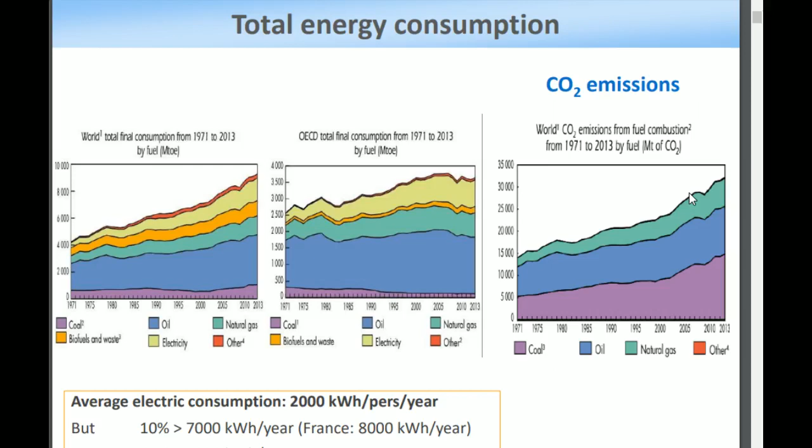very important because they release a lot of CO2. Obviously, solar technology does not emit CO2 -- well, this is false, because a bit later we will see the mechanisms to synthesize silicon, well, a variety of silicon, and it releases a tiny bit of CO2. You also have to consider the transport, but we'll see that later.

So at first, the solar resource: the sun lights the globe at a certain level. We can see that at the poles the illumination is very limited. In France we usually say it's 1000 watts per square meter, and you can see that near the equator it's maximized, due to the fact that even though the Earth is tilted, on average the part that is most lit by the sun is around here.

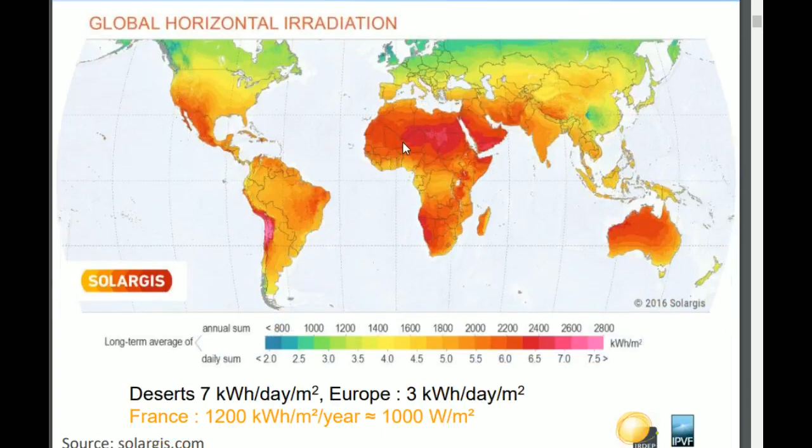Well, I think it's around here, but there are also deserts. So okay, there are deserts. We can think that maybe it will be good to place solar panels in the desert, but it's actually a bad idea because the panels need to be at low temperature, and that's not the case in the desert.

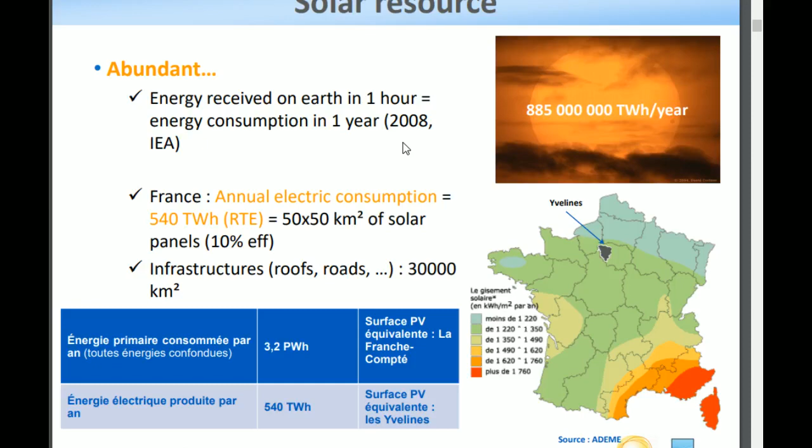So at first, it is a very abundant resource. You could technically power a lot of human technology with it. You can use it on roofs and roads, and in France it could be a very good opportunity because we can install it very quickly.

One of the problems is that in terms of time it's non-constant. During the day there are clouds, and the intensity of the illumination is not the same. Monthly you will have a peak in summer, but not really in winter, and even through years you can have a fluctuating intensity of illumination.

So the solar spectrum: the sun emits something that is really close to what's the name, Boltzmann's law, one of the Boltzmann laws. It's some kind of curve that peaks at a low wavelength and then diminishes slightly. You can calculate it. Yeah, it's Boltzmann's law -- something like the wavelength in micrometers is equal to 2898 divided by the temperature in Kelvin.

Then you can see that there are little weird things: the absorption by some elements, dioxygen, water, and there are also a lot of other elements. So as you can see, the spectrum is a bit weird with this chainsaw-like shape, and the visible wavelength is around here. We can think that at first the first solar panels were gathering the energy around here, and now with research we are capturing the whole spectrum with the panels.

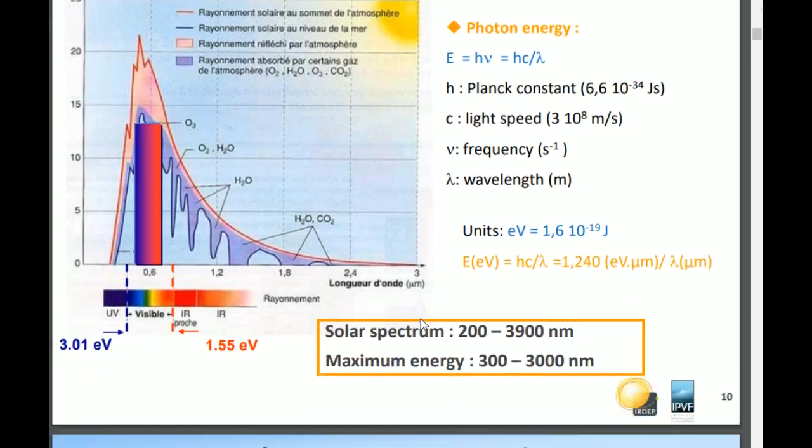Okay, so there are a few technologies of solar conversion. The biofuel, so everything with photosynthesis. The thermal and heat production, which can involve a panel that uses water as a flow, and the sun radiates on it and it goes back to the home.

And there is also another kind of thermal heat production called thermodynamical plants. It looks like this: you have lots of mirrors that are concentrated on a single spot, and it can reach really high temperatures, with a special fluid used to gather energy. And finally, the topic of this presentation is the photovoltaic.

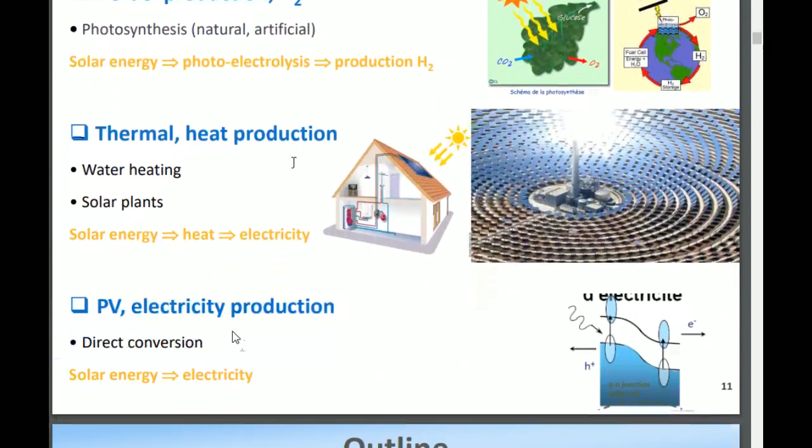Okay, so that's pretty much it. So the history: at first we had an electrochemical cell by Becquerel. However, it was not really about the light. It was just a notice in a paper where he remarked that when the cell was under the light, it could generate more energy.

The real solar cell is the one by Adams and Day, which was specifically designed to be under the light. Then we have the first cell using silicon. So silicon is one of the most frequent materials that you can find in the ground, alongside dioxygen in the deep layers of the ground. So we might not run out of it, and basically it's sand. So with sand you can build the panel.

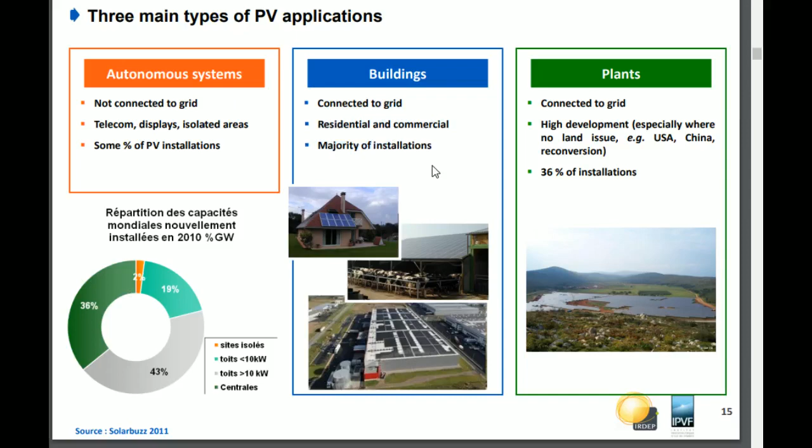Yeah, there is also this one that is used sometimes in the industry, but I'm not going to talk about it yet. So there are three types of PV applications: the autonomous systems that work on themselves, buildings, so residential or commercial, or plants that are connected to the grid. So the autonomous systems can work on themselves. It used to work on small calculators. It can work on very isolated sites.

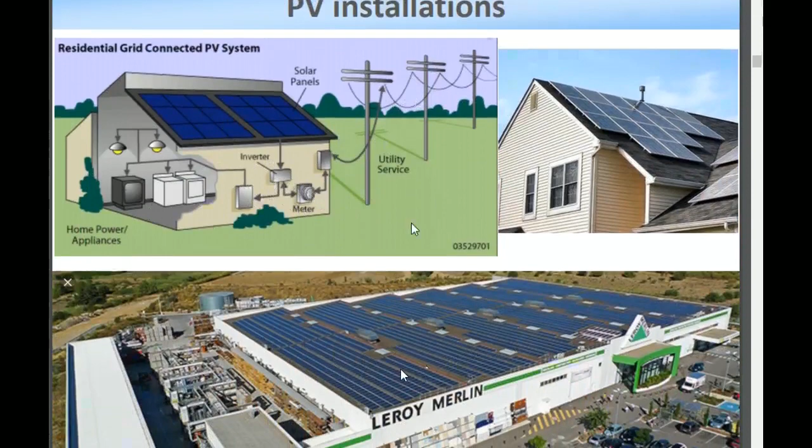I'm not going to go too much into detail, but what you have in a residential grid is usually a panel, an inverter, so in French an onduleur, a device that regulates the charge, called a régulateur de charge, and the battery. And you can also supply it to the grid or use it for home power. It's sometimes convenient to put it on commercial parts because you can't see them, and it produces a lot of electricity. You can also build them directly on the surfaces.

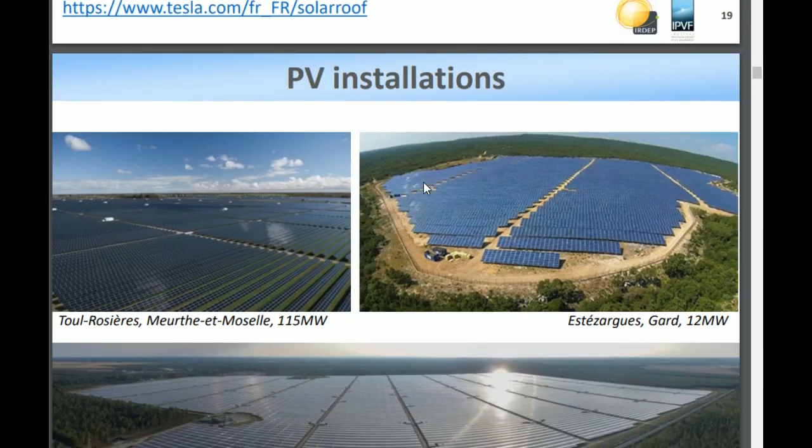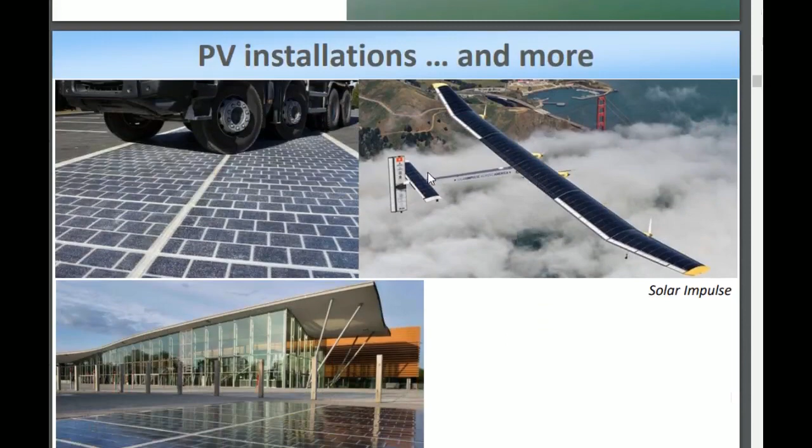So there are also great plants that produce a lot of electricity in the desert, like in Chile, or in Korea. As I said earlier, the efficiency increases when you are at lower temperature. So building it on the river is very good because the water cools down the panel, so it's great. And you can also have the panels directly on a plane or in the street.

So for the grid, you can have a sum of this. The PV panel will have modules and bypass diodes. Bypass diodes matter when one of the modules is shadowed: the current might go reverse, meaning that the other modules that are lit will use the shadowed panel as a charge, and the bypass diodes will prevent it, since otherwise the energy produced goes directly into heat, and this means that the energy would be lost.

There are systems of balance: charge controller, storage, cables, converter, so DC to DC to adapt the voltage, the inverter, so onduleur, and mounting frames. And finally, you can output either to your AC loads, like the usual stuff, DC loads, which is a bit rarer because usually you don't use DC outputs, or directly to the grid.

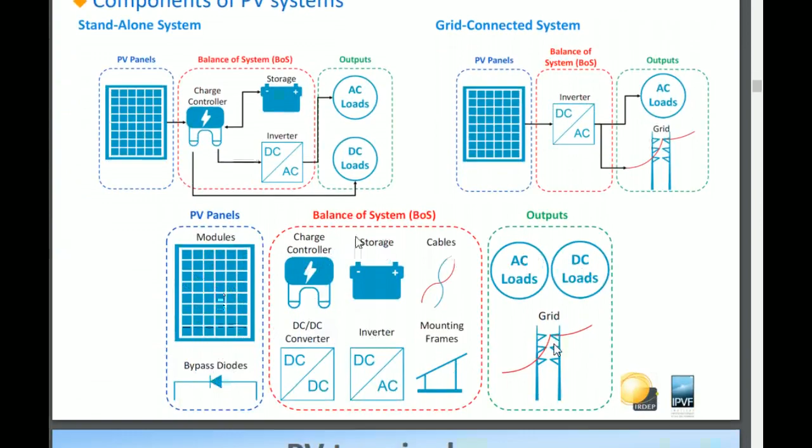So the solar cell is a single cell. It's very small. A module is an assembly of solar cells, so it usually has a lot in it. And when you have lots of modules, you make panels. And when you have the panels, you have a solar plant.

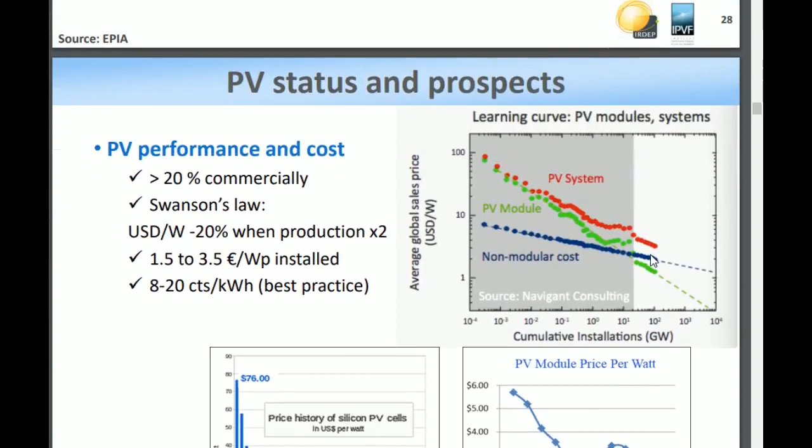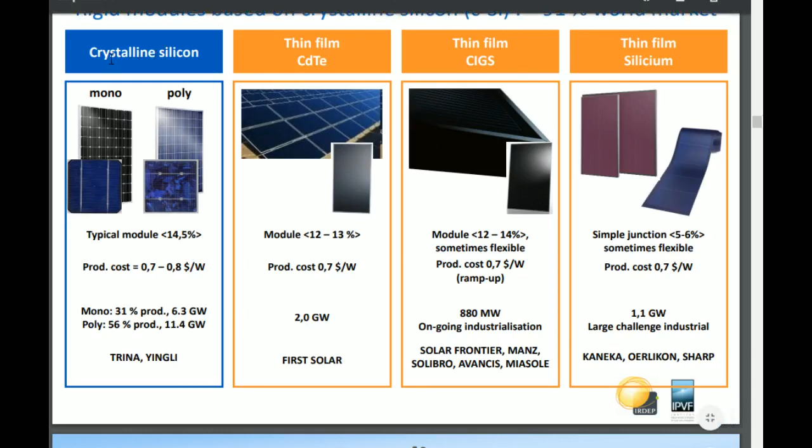Okay. So now let's talk about technologies. So crystalline silicon is the one that is the most used. It represents 91% of the world market. The thin film, usually cadmium telluride, CdTe, or CIGS. So the thin film technologies are the ones made by deposition, and the crystalline ones are made by crystallizing the cell. You can notice that these companies here are made in China, so that explains a bit why they are top of the market.

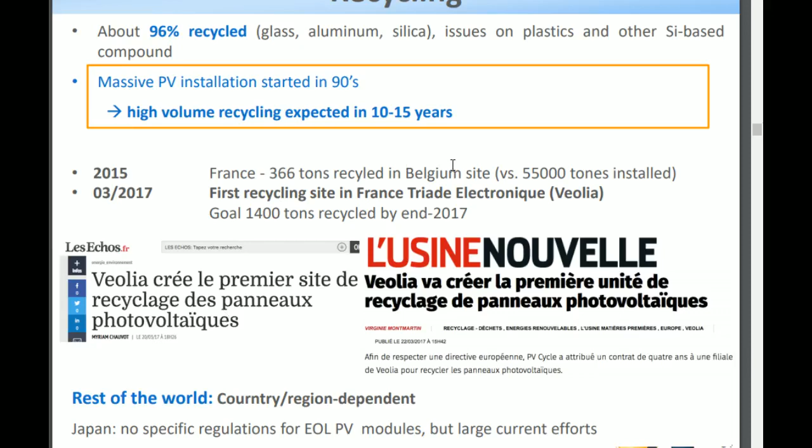Recycling. So in Europe, there are regulations about recycling PV modules. We will talk about it later in the analysis of the life cycle. Okay. So recycling is very important. 96% of the panel is recycled. Recently, a new site has been constructed by Veolia, but before we used to recycle in Belgium. For example, in Japan, there is no specific regulation for PV modules.

So the challenges are to get cheaper panels, to have better ones, to have ones that better fit consumer needs, and stable ones.

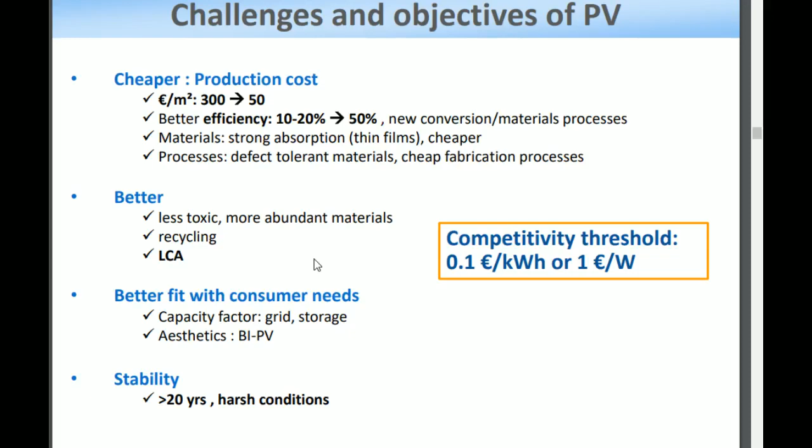Okay, now let's do a bit of physics. So when a photon enters the material, it has energy that is quantified, so it's quantum physics. It goes from an occupied level to a non-occupied level, and there is an energy called the gap energy. And there are three main things to consider in solar cell operation: the generation of carriers due to light absorption, the separation of carriers, and the collection of carriers at terminals.

Okay, so at first, a metal does not have a distinct conduction band and valence band. They are both in the same part, so electrons are free to go from this part to this part, and the electrons can move freely in the metal. When you have an insulator, the band gap is really important, and the electrons are usually stuck with their atoms.

A semiconductor has a small band gap, and you can see that there are electrons that are in the conduction band, and you have electrons that are not here in the valence band. So you have rare presence of electrons in the conduction band and high presence in the valence band.

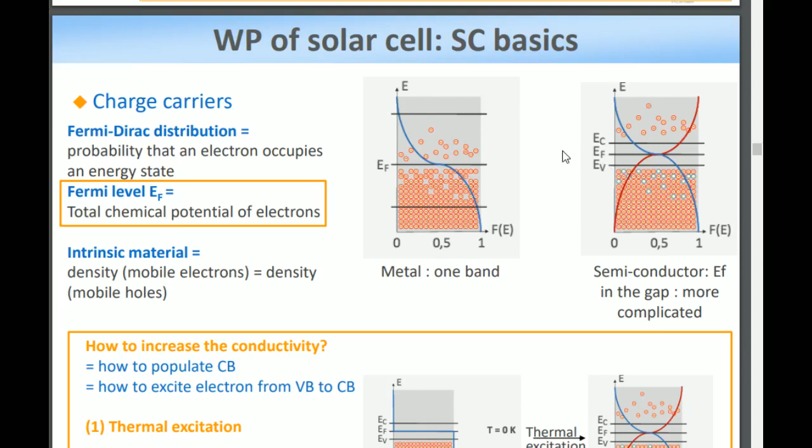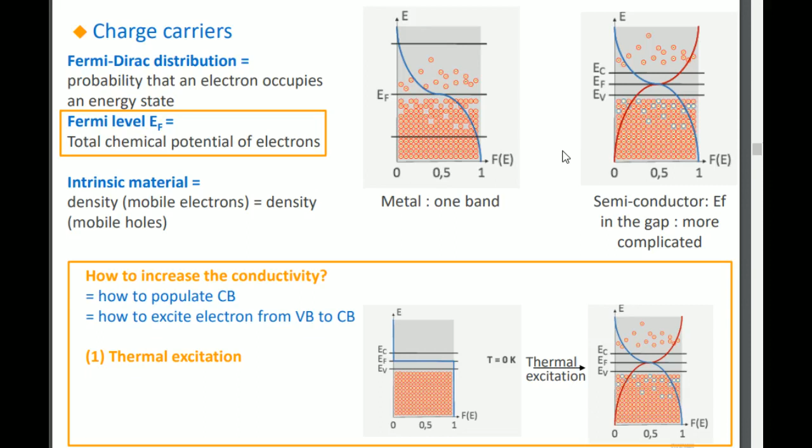While for a semiconductor, the gap is really small, but the electron can go on the two sides. So when it's here, the Fermi-Dirac is very close to the lower layers. So for an intrinsic material, the density of mobile electrons is the density of mobile holes, because it means the material already has holes in it, in opposition to extrinsic materials that have carriers that are added by the human. So you can, for example, increase the conductivity.

So the charge carriers, when you have doping: you can either add the impurity or it is already in it. So when you dope, you are in an extrinsic material, and otherwise you are in an intrinsic material. So for example, here we have a matrix of silicon, and we replaced one of the silicon atoms by phosphorus, and it means that there will be a negative carrier that is added to the matrix, and you will get N doping, so a donor.

And if you replace the Si by boron, you will have a negative charge and a plus, and this plus is called a hole, a mobile hole. It does not really represent something in reality. However, you can view it as an anti-electron. Why? Because in material engineering, even though you can't see it, it represents a charge locally that is higher. So like some kind of antiparticle of the electron, but it's not a positron. You should not say that it's a positron, because it's not. It represents that on average there is something that exists, so we consider that it exists. Okay.

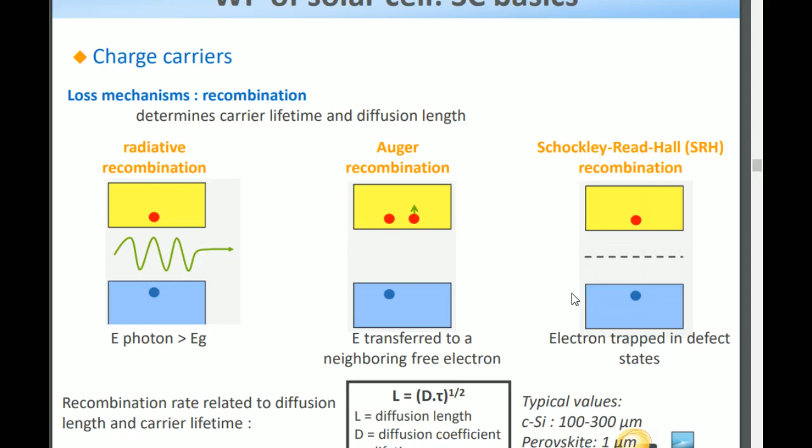There is the Auger recombination. When you have an electron down and one up, the up will give its energy to another up. The up will go higher, and the down will go down. And finally, the Shockley-Read-Hall, so SRH recombination, occurs when you have an electron trapped in defect states. It's a bit more advanced, so I'm not going to talk much about this one. But there are a lot of mechanisms involved.

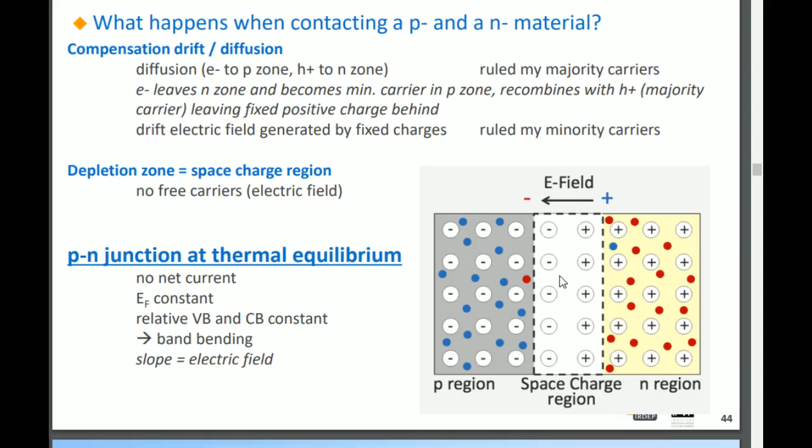So to evaluate the performance, we build the curve I in function of V. So you can recognize that in the dark you have the characteristic curve of a diode, so LED, DEL, I don't know the acronym, something like that goes like this. And when it's lit, you have this kind of curve that looks like this expression from the material engineering, and it will be very helpful to have this curve later.

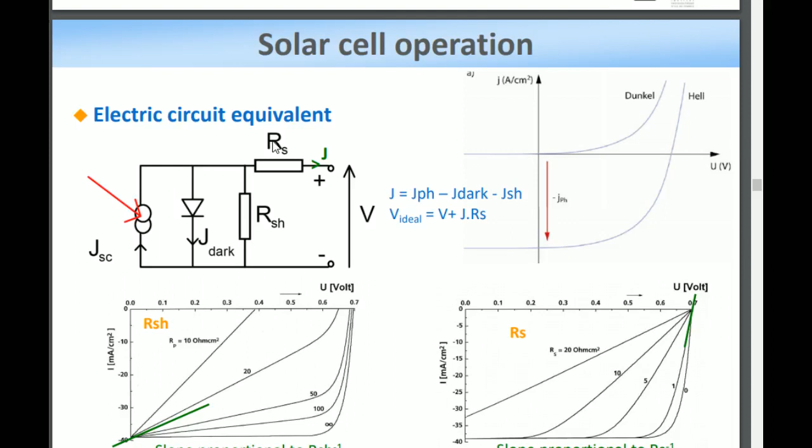So you can do a modelization of the cell. So the cell on itself will be all of these things. So at first a generator of current, a diode that will limit the sense of flow of the electrons, a resistance that is called the shunt resistance, SHUNT, and the series resistance. And you can see that we used to build the different characteristic curves.

So at first we can notice that the derivative where U is equal to 0 is equal to the inverse of the shunt resistor, so the slope here. And otherwise we can see that the derivative when I is equal to 0 is equal to the inverse of the series resistance. What else? So usually like in every field of engineering we have some conversion efficiency.

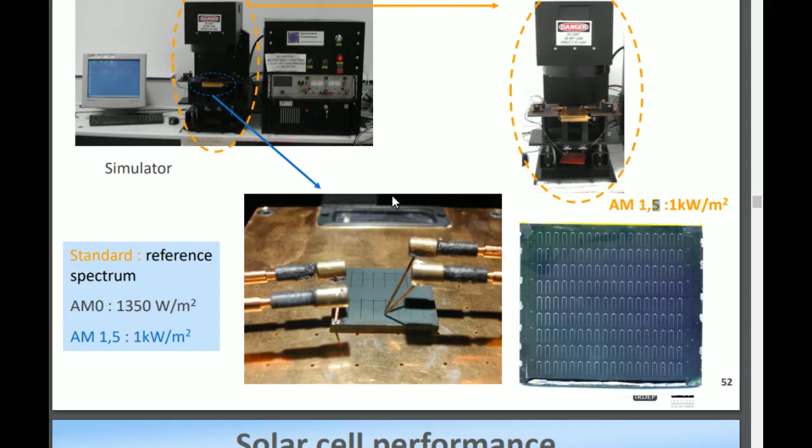So usually you can do simulation. So there are standard criteria for evaluating solar panels. For example, AM1.5 is a reference for the inclination, the tilt of the panel, and a certain enlightenment.

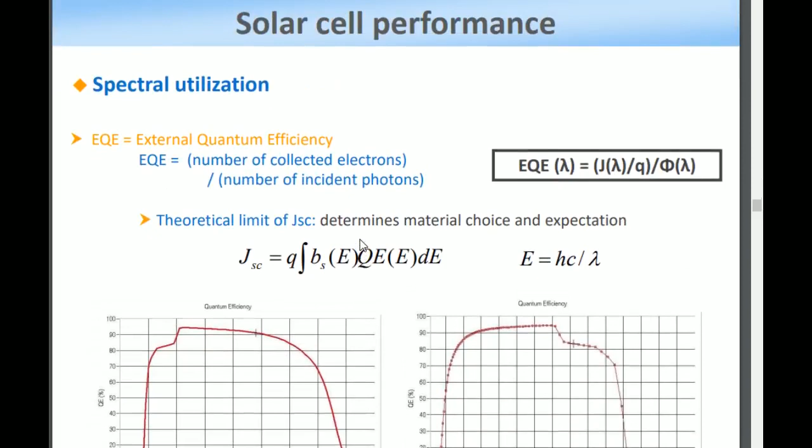Then, okay, so now we will talk about external quantum efficiency. So it's the thing that is on this axis, and here on this axis you have the wavelength, and here the photon energy. So it represents the energy that is gathered depending on the wavelength by the panel, and obviously you will have a theoretical limit depending on the material choice.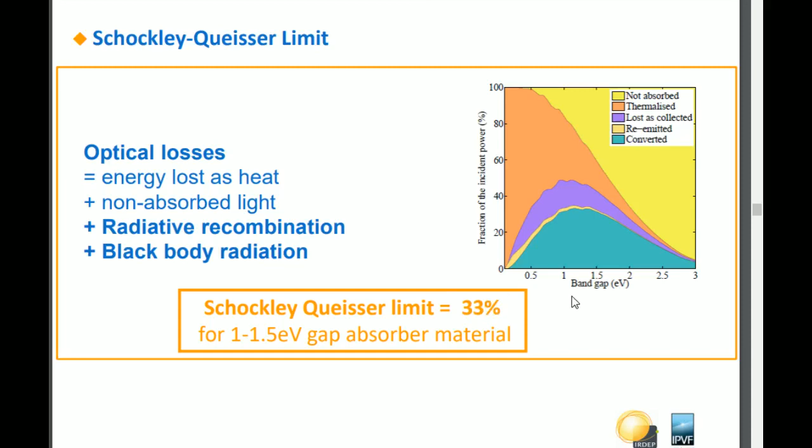However, we've seen earlier that the efficiency could reach values that are higher than 33%, and we might see it later. I will explain why we can overcome this limit and how we did it. So you can see that depending on the choice of material you take as a semiconductor, you can have a various range of spectral responses. Usually we take the gap value of 1 or 1.5 electron volt. It can also happen that there are parasitic optical losses. Yeah.

So the production in terms of the market, it's mainly polycrystalline silicium, monocrystalline silicium, and thin films. Okay, so now let's talk about the silicium. So the silicium has a structure that is very like the one of the diamond. So usually we call it a cubic diamond structure.

Okay, now how does it work to synthesize the silicon? So at first you have something called silicium quartzite, in French silice. So it's a rock that is taken from the ground. Then you have a furnace that is pretty much the equivalent of the ones you can find in metallurgy. So basically you heat really high. So the temperature of fusion of the silicium is 1500 degrees Celsius. So you put it in the furnace and you can extract metallurgical Si. So once you have this, you can split it. For example, this will also be used for electronics to build a semiconductor for the CMOS people.

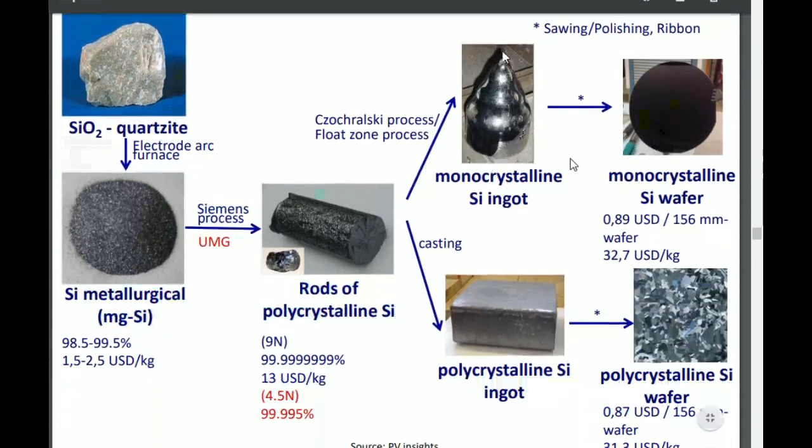So the electrode arc furnace is the one that you can typically find everywhere in metallurgy. So you have carbon, you have silica, so it's oxide of silicium. You make it heat with a temperature that is higher than the temperature of fusion of the silicium. So a lot of things happen. You recover the energy, and you have your silicon.

Okay. Now, the manufacturing of the silicons, we have a Siemens reactor. So we have a quartz frame, silicon rods, and the graphite electrodes. So it's kind of complicated, but basically what you do is you put the silicium, and you will have some kind of purification called the Siemens process, using hydrogen chloride, and it will purify of all the things.

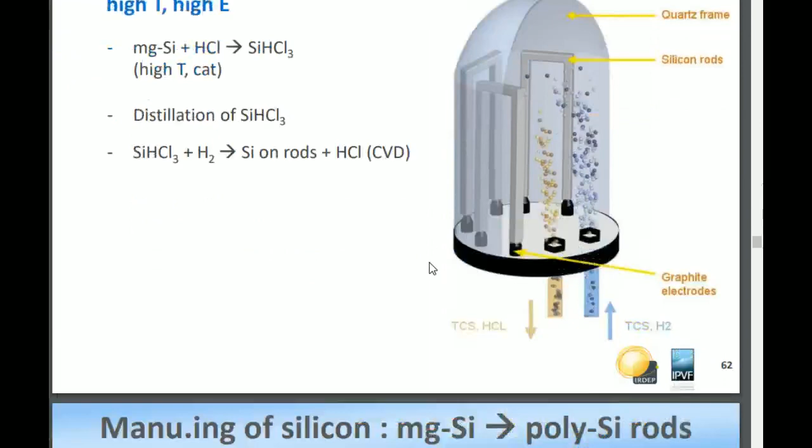So you will have mg-Si plus HCl that will get this. So this is a gas, and then you do a step of distillation, and with dihydrogen you will grow silicium on rods, and you will have HCl that is useful for CVD. So this is what a big tower of Siemens process looks like.

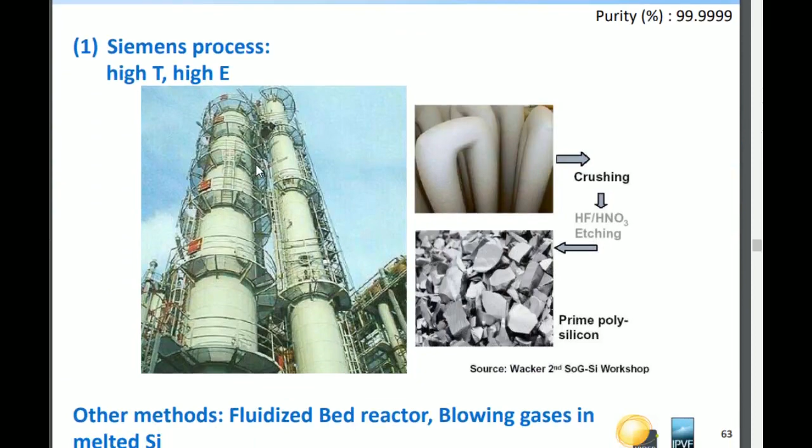Okay, there are other methods. Oh, okay, so this is the Czochralski that I was talking about. I forgot that there was a slide about it. So here you have a seed of the crystal. As you cool down, the crystal will take the structure of the seed that is higher. So by implementing this seed, that is something that you add by yourself to the silicium, when you cool down, it will take the same structure as the top one.

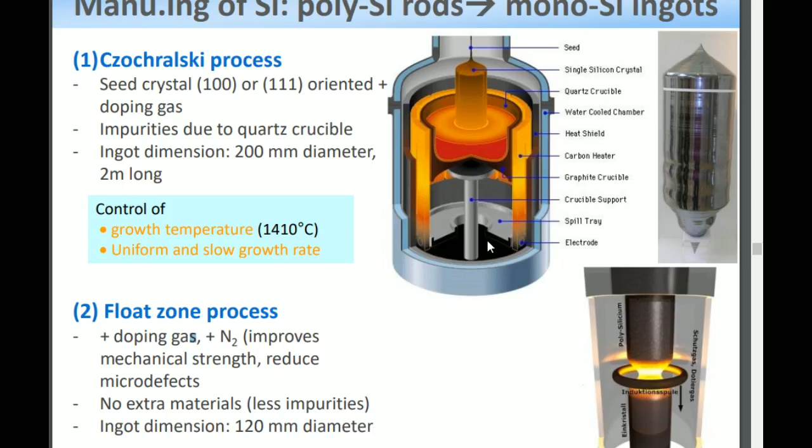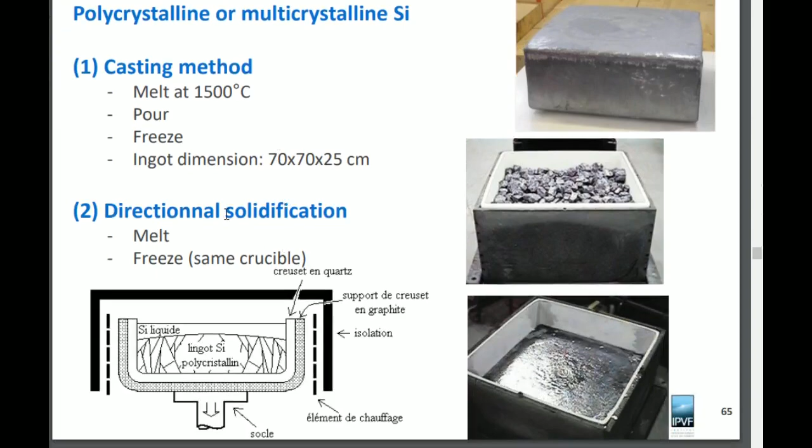There is also this process, but I don't know exactly how it works. It's some kind of doping gas. Oh yeah, I forgot to say, in this Czochralski, you can add doping gas in your semiconductor. So depending on what you want, you can add it directly, and it will directly go inside the matrix of the material. So to go from polyrod to polyingot, you just melt it, and you can have also directional solidification.

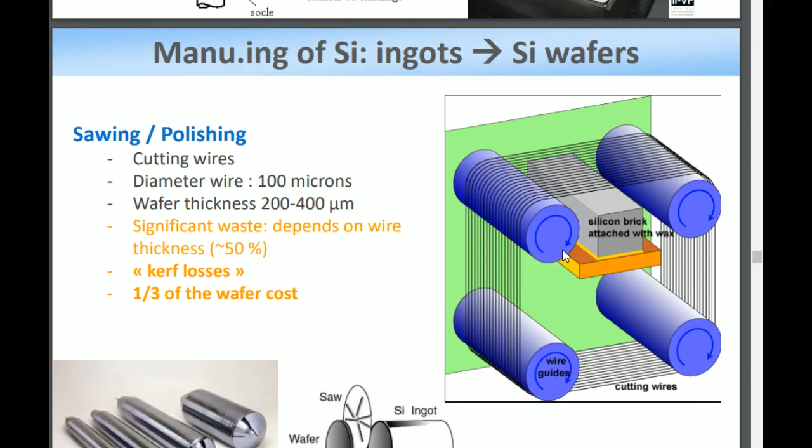Now you must turn the ingots into wafers, so you cut it, and there are also lots of losses due to the fact that you cut. And in recent years, the kerf was not recycled, and now we use it. We recycle the kerf because it's a lot of the cost. It's 1/3 of the wafer cost. Oh no, the sawing and polishing is 1/3 of the wafer cost, but the kerf can be really significant. So around 50%.

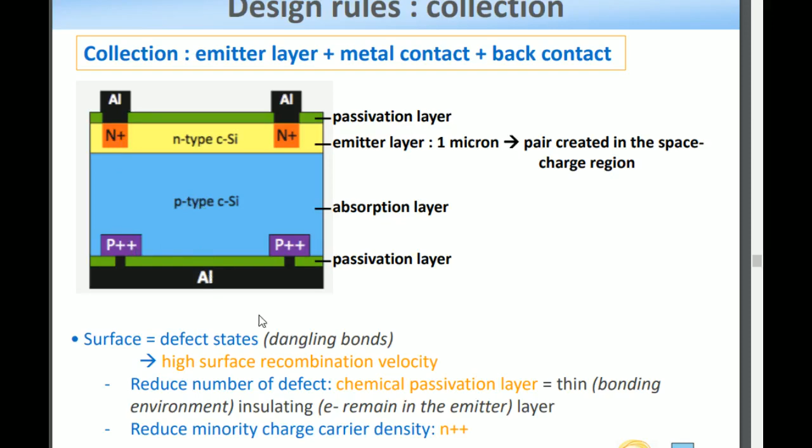Now, the collection. Once you have your pair of charge carriers, you must collect them. So this is what it looks like. Okay, you can have a certain amount of plus, N plus, P plus, P plus plus. So I'm not going to go back into that. But you have your NP layer, your N plus, P plus, and also the aluminium in order to get the current, so the conductor.

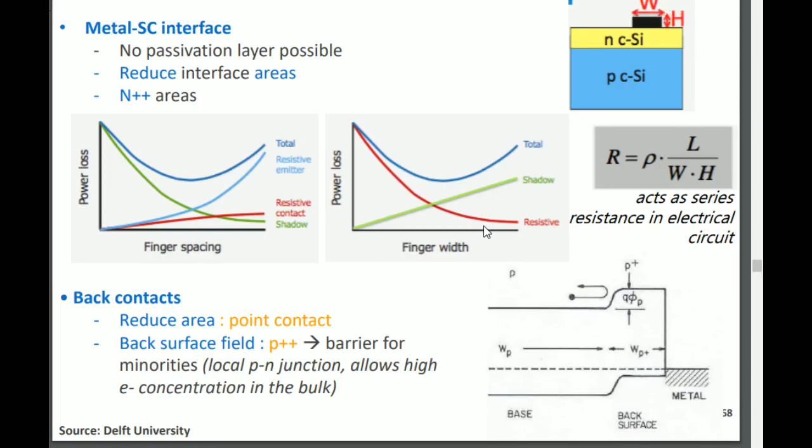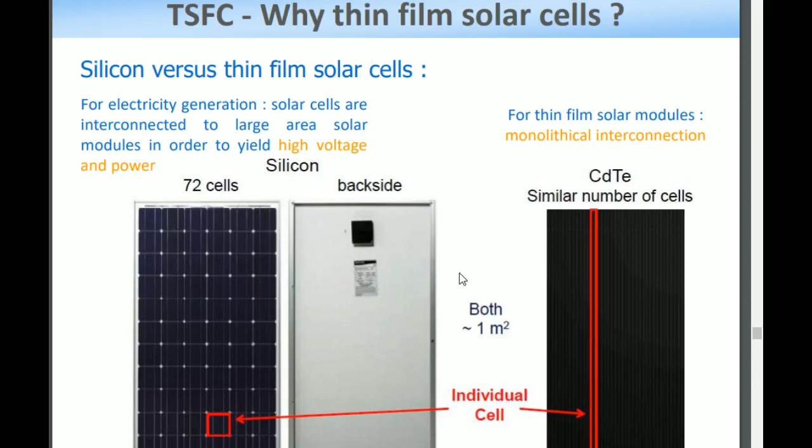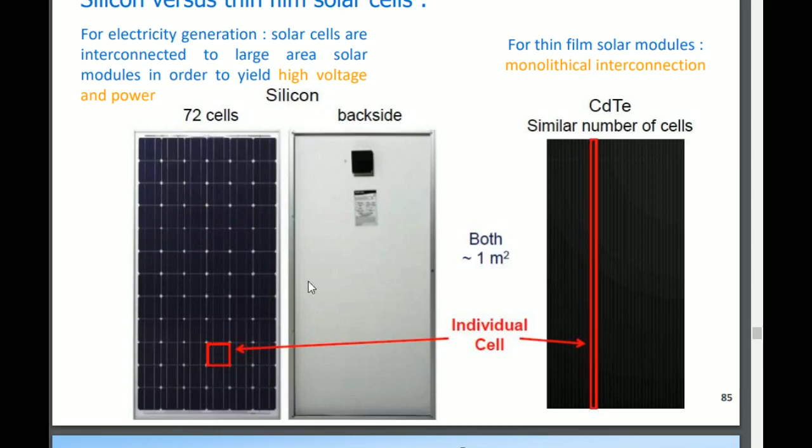Now you can see that the different cells can have different forms. For example, here you have a square cell, and here you have a long rectangular cell, with some kind of monolithic interconnection, so everything is linked between them instead of having small squares. This is what it looks like on the interior.

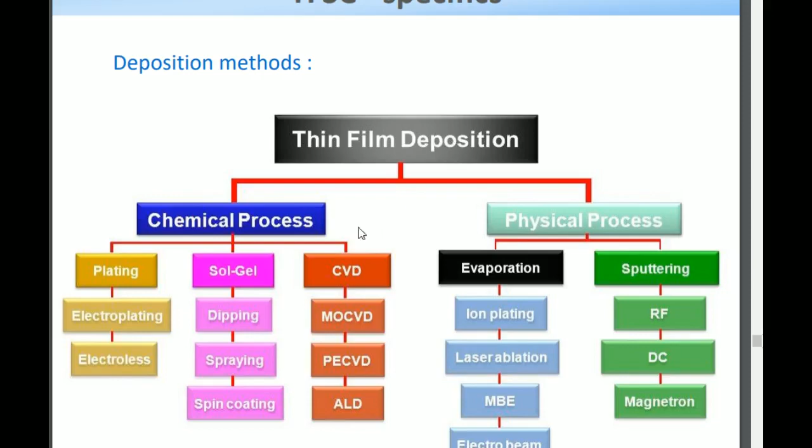Now let's talk about the deposition methods. This is really interesting for the new technologies. You have two big families: the chemical process and the physical process. The most common is CVD, chemical vapor deposition, and mostly plasma enhanced chemical vapor deposition. There are also lots of techniques that are more on the research side.

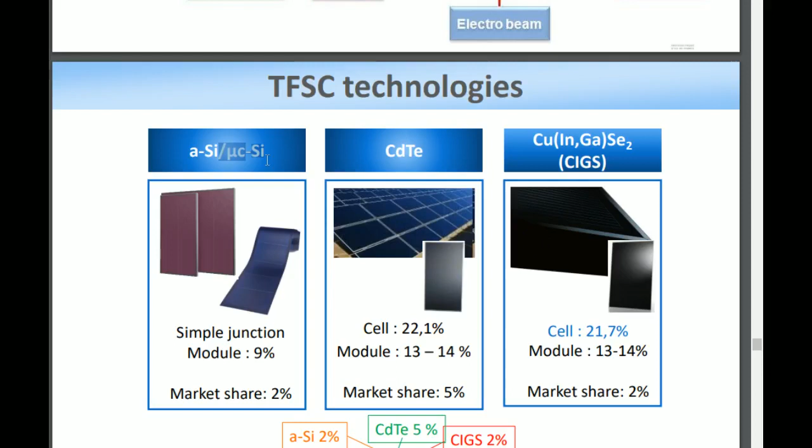Now about the new technologies: here you have amorphous silicon, a new kind used in simple junction modules, or microcrystalline Si, which are new technologies. There's also CdTe, cadmium telluride, and CIGS - copper, indium, gallium, selenium. You can see that these have a really small share of importance in the PV market.

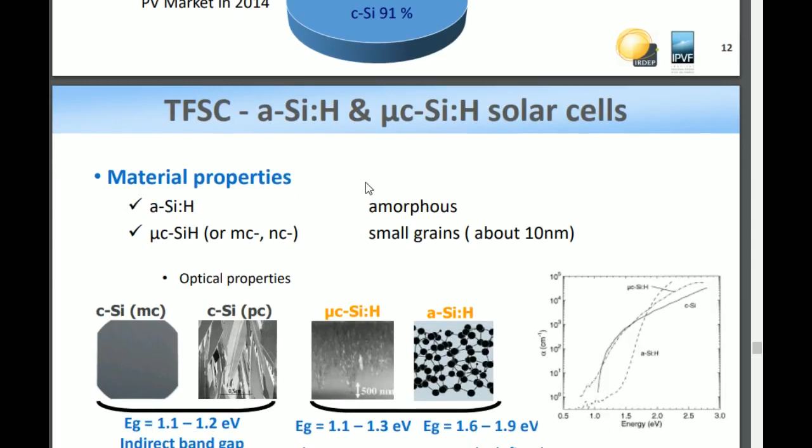They have a gap that is near an electron volt, and they're really close. So what does this notation mean? This means microcrystalline silicon with addition of hydrogen.

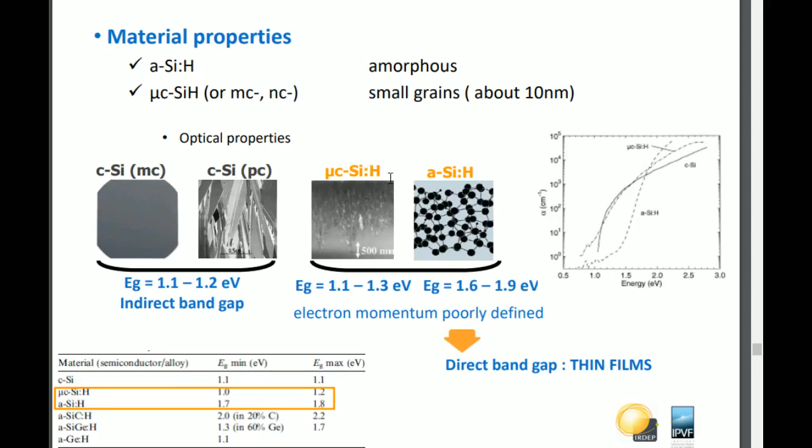What that means is inside the structure you will add hydrogen, and the fact that you add hydrogen is not something you actually want. It's usually the result of bad synthesis, or just the natural process - well, not really natural, but when you synthesize it, you get hydrogen that appears due to the imperfect parts of the synthesis.

So this is what it looks like, the H. Basically your ideal structure will be like this, but sometimes a dangling bond will pop up. You can see here it's 5 to 10% of atomic hydrogen, and the dangling bonds involve high SRH recombination, which is bad.

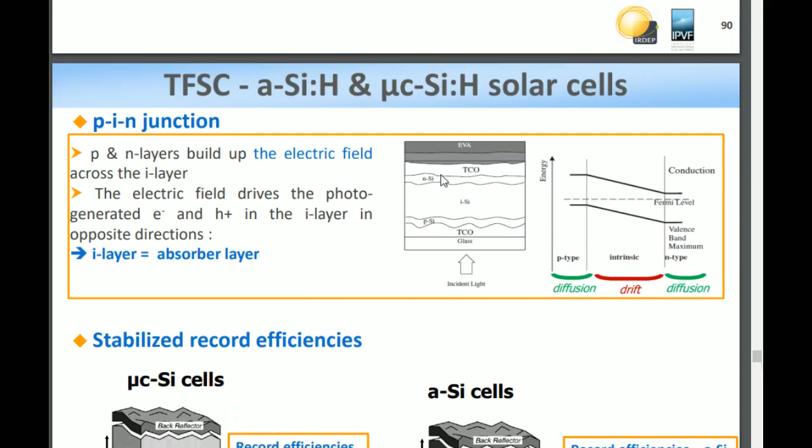This is why we use a PIN junction and not a PN junction. We've seen earlier the PN junction - positive negative semiconductor. Now we'll use the PIN junction. The PIN junction has a part that is an intrinsic semiconductor, which does the transition, and it will be needed in some of the new technologies to improve the efficiency.

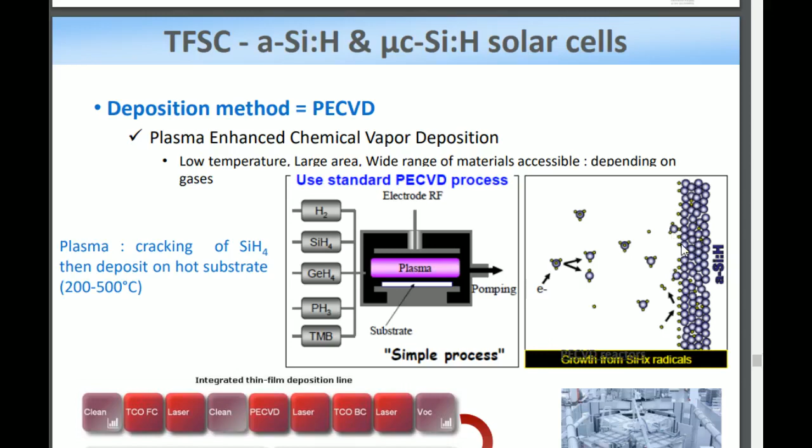Now let's talk about plasma enhanced chemical vapor deposition. Usually it's done at very high pressure - I don't know, I have a doubt whether it's high pressure or low pressure. Basically you have a plasma, and you add a bunch of gas, and you get a synthesis of radicals that will deposit.

You can build very large modules this way. The challenges are mostly in the homogeneity, the efficiency, and the deposition times, because this can take very long - sometimes hours, sometimes days.

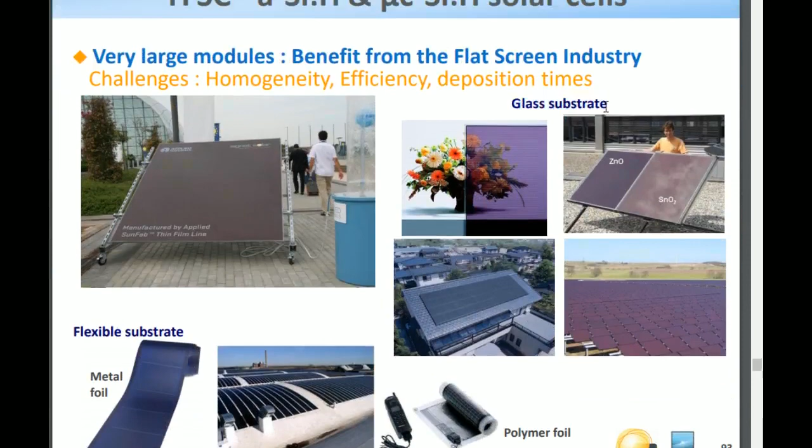And you can put it in lots of things - for example, flexible substrates. With thin layer systems, you can actually build flexible substrates, which is very cool, and directly inside glass. So for example, in your window, you could have a PV module.

The advantages: thin films absorb low and high intensity light, you need less semiconductor, and high temperatures do not significantly reduce performance. However, you have lower efficiency, there is degradation of the material in sunlight, and the production requires hazardous gases.

So the major challenges are to achieve laboratory-scale performance from production modules, and mastering the production of multi-junction devices. We'll talk about multi-junctions right after - at first we've seen single junction devices.

Okay, so now let's talk about CdTe. This structure is what we call the blend structure in French, or also cubic Td structure. So it looks like this.

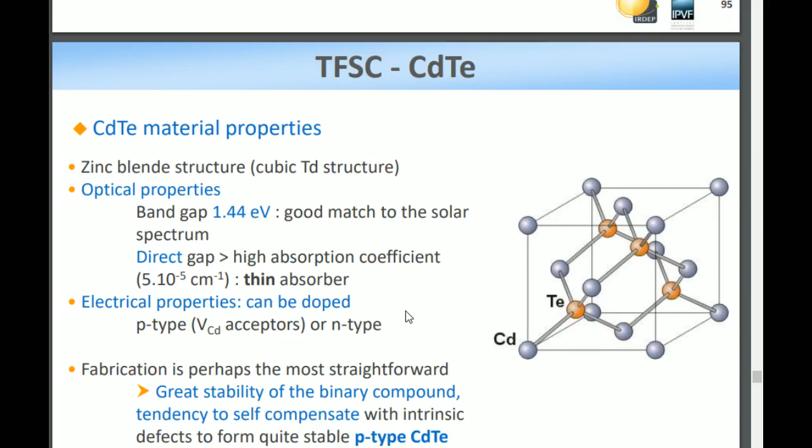The band gap is 1.4, so it's good for the spectrum. It's a p-type and can be doped.

So this is what it looks like from the side. Here you have the glass, so the sun goes through the glass. Here you have some layers. You have a very small part of N and a big part of P, and here you have your paste and copper.

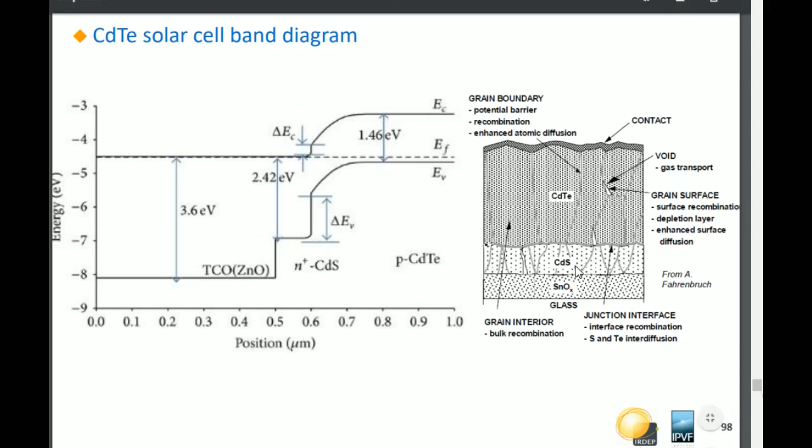So this is what it looks like in terms of spatial representation, with energy on this side. Here you see a very low energy, you have a change of parts. You can see here you have the glass, the CdS, and the CdTe.

So the deposition techniques: you have vacuum methods and non-vacuum methods. I'm not going to go too much into detail. Maybe physical vapor deposition is the one that is most used.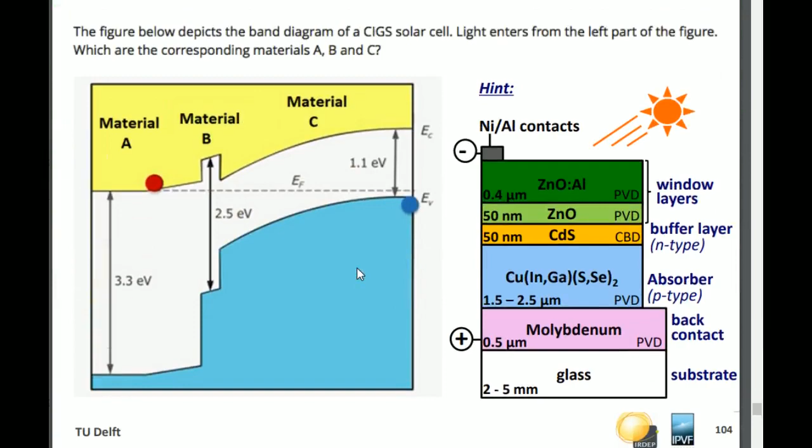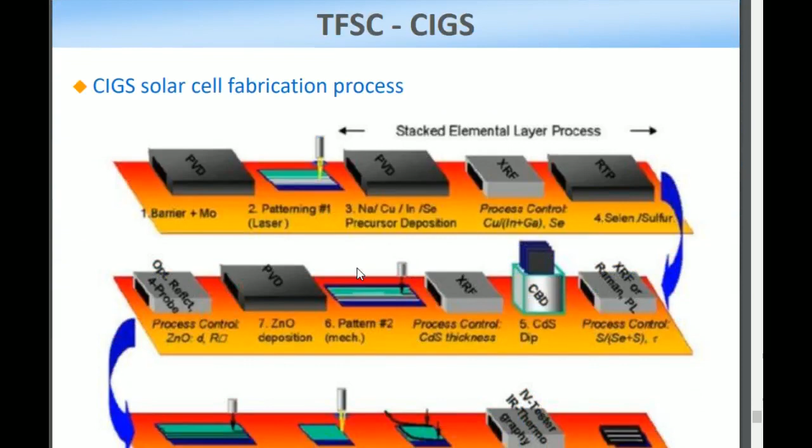So you have kind of the same sandwich structure that occurs. You have some kind of very long fabrication process that I'm not going to talk about much, but I think you understand what I mean.

The advantages of CIGS is that you can tune Ga addition to boost absorption even more. It's well matched to the solar spectrum. You have high efficiencies. The disadvantage is the process is expensive, as you've seen in the picture that I skipped, and it is very long. Gallium and indium are scarce metals, so they are very rare.

And we might go for new concepts with ultra-thin and micro cells.

Now let's talk about the PSC, the perovskite solar cell. The structure is like this one. It's structured as ABX3. Basically you have a cation in A, a metal in B, and X you have other stuff.

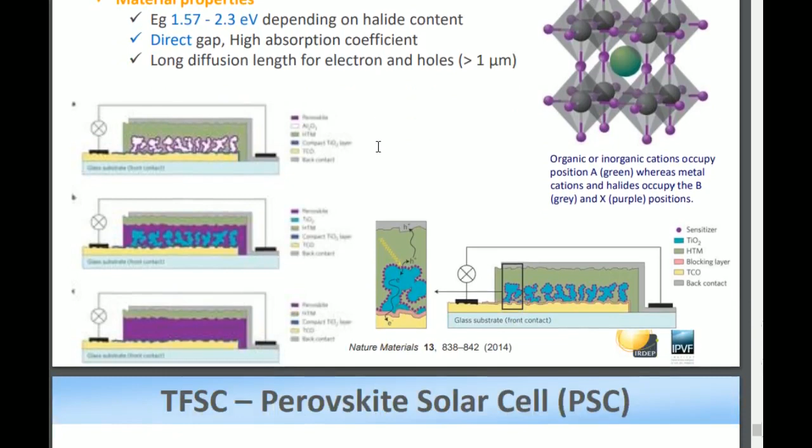Perovskite can be synthesized either in a liquid process or a vacuum process. The advantage is that in 4 years it went from 3% efficiency to 20% efficiency in labs. It's a very low-cost process, like ink printing.

The Guardian recently titled an article 'Perovskites: the future of solar power?'

Now let's talk about the Shockley-Queisser limit. As we've seen earlier, there is a limit that is 33% for a panel, because you can prove that at most there is 36%, 33%.

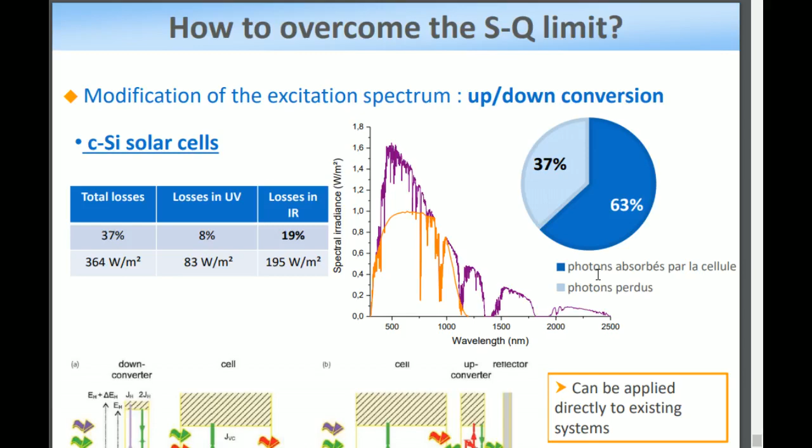For example, for the c-Si solar cell, only some of the spectrum, what's in orange here, is actually gathered, while this is all the spectrum that is on the solar energy at the surface of the Earth.

So what we can do is some kind of conversion. Imagine that you have 3 rays, and depending on the wavelength, you can use different systems.

Okay, now the principle of multi-junction.

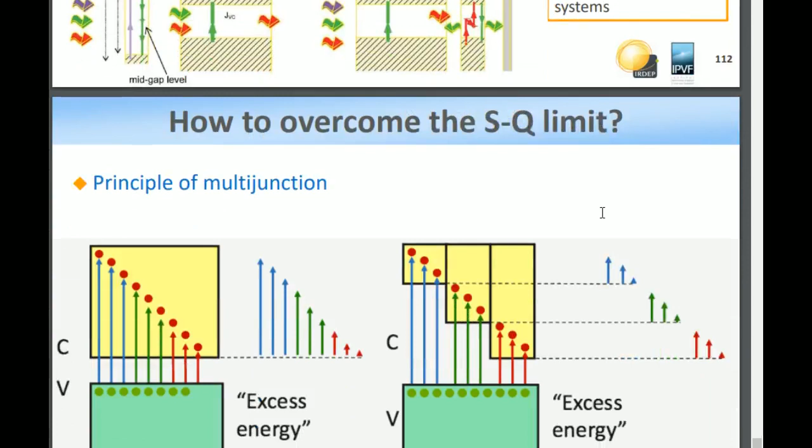This can be applied to an existing system and can overcome the Shockley-Queisser limit. The principle of multi-junction is that when you use a single panel, you have one panel that should deal with all kinds of frequencies.

Imagine the big arrow represents the part gathered from the sun, and the small arrow represents the excess energy that isn't gathered. The idea is to use multiple layers of junctions, multiple panels in series, to reduce this excess. For high energy, you use a panel special for high energy that gathers that part, leaving a very small excess, then do the same with lower energies to diminish the excess energy further.

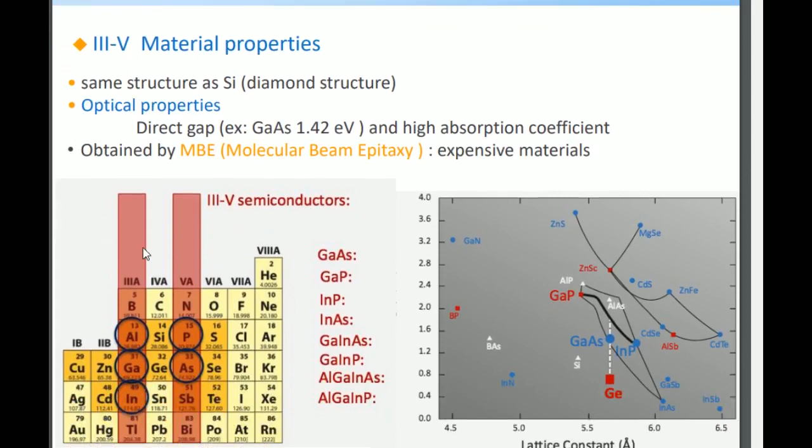In terms of material, you can see silicon here, and some materials are called the 3-5 materials, meaning they're from column 3 and column 5. So when you build your semiconductor, you use elements from groups 3 and 5, for example gallium and arsenic, which is very commonly used.

You can do stuff by epitaxy, I'm not going to go too much into detail. Obviously you can put it in a graph and decide what's going on, but I didn't clearly understand what it was.

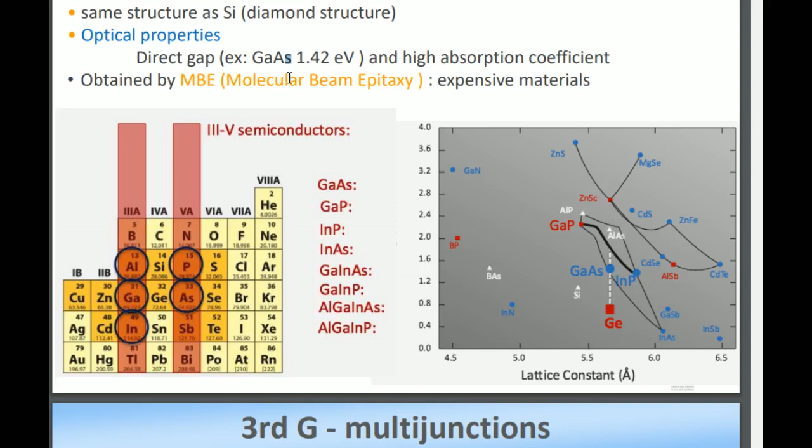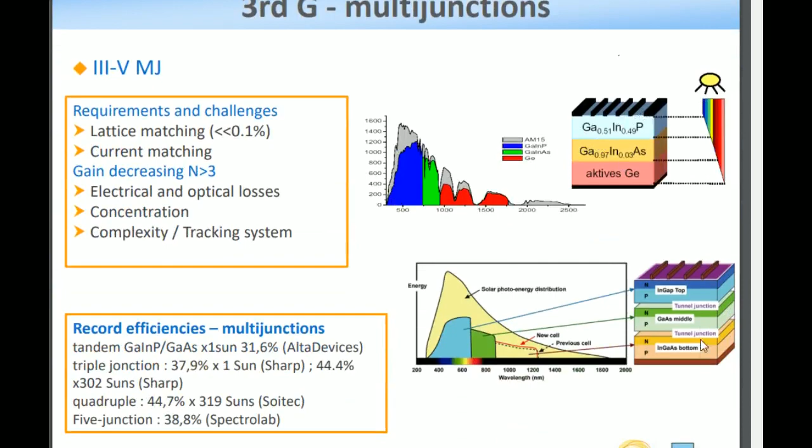You can do MBE, molecular beam epitaxy, to build expensive materials, and you can even have fractional compositions depending on what you want. For example, here you have layers with different compositions. If you multiply this coefficient and this coefficient by 100, you can see the proportion of gallium and indium are different, and you can see that here on the spectrum.

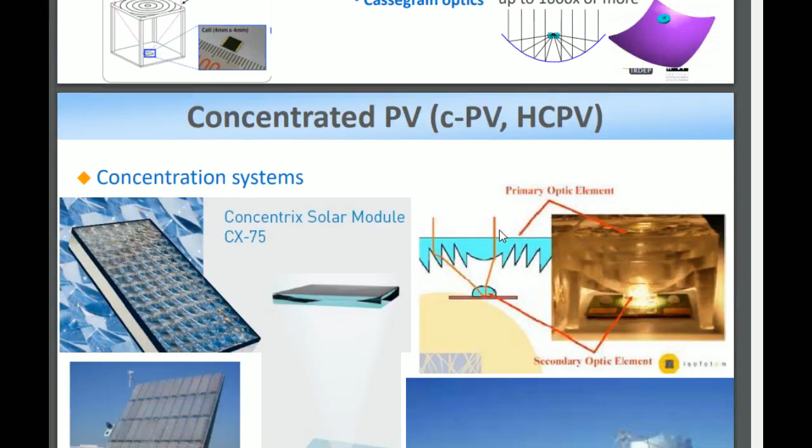It's expensive, and space likes when it's expensive, so it's used for space applications. You can also find it in concentrated light systems, like in deserts. You can use concentration systems with different lenses, the Fresnel lens is a lens that always converges like here, and you can also have mirrors that are parabolic or planar.

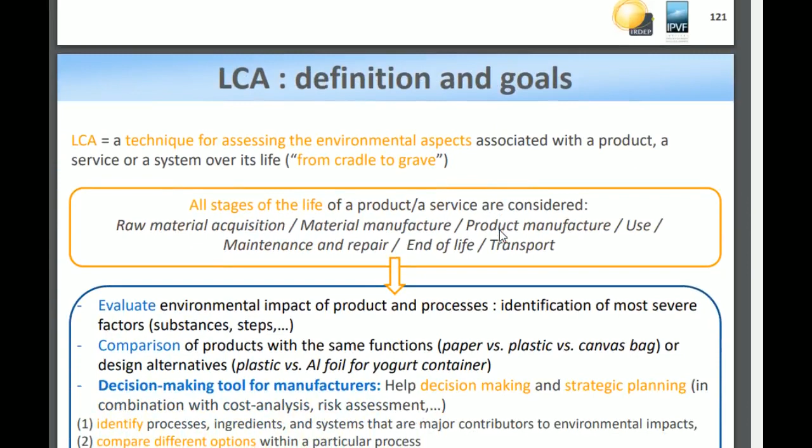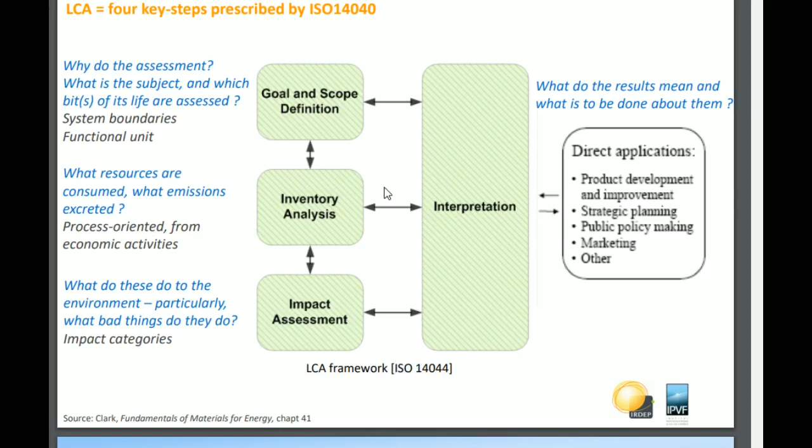LCA means analyse du cycle de vie, in English life cycle analysis. You take all the stages of the life of the module and consider it. This part is really environment-oriented, and it helps decision making for manufacturers. There are different regulations around it, for example in Europe there's the norm ISO 14044, which is the LCA framework explaining exactly what you need to do the LCA.

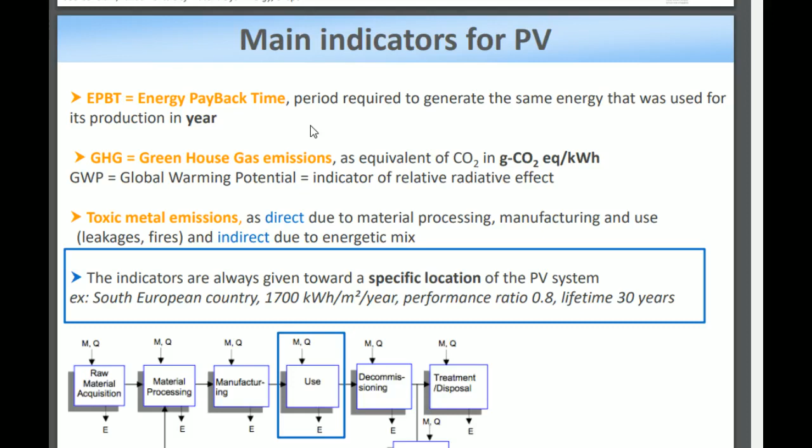There are various variables considered: EPBT, energy payback time, which is the equivalent in years to produce the energy used for production. GHG, greenhouse gas emission, the equivalent in CO2 of its production. Toxic metal emissions. You can compute all this using algorithms with computers.

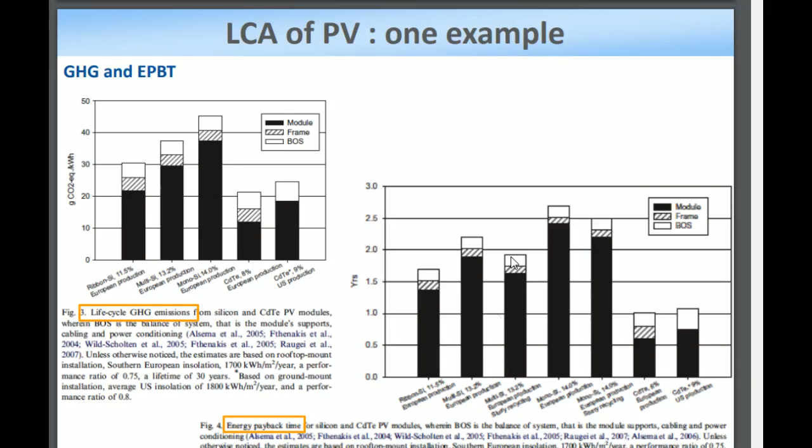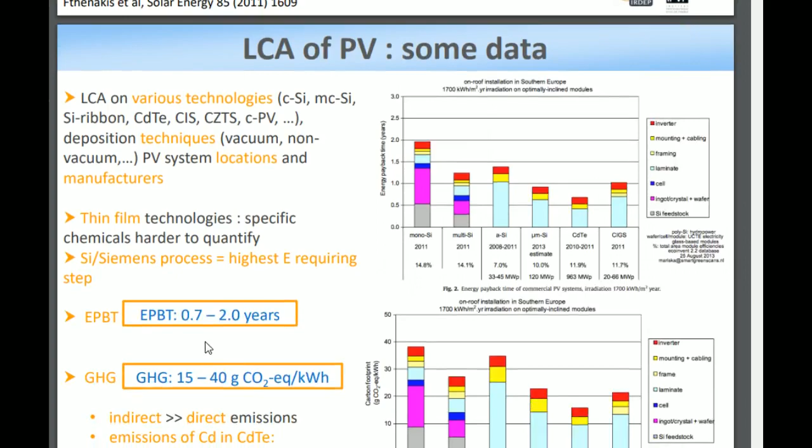In terms of energy, you can see there are small differences in terms of carbon. You can see here the payback time, which can be very different depending on the technologies. You can have a different range of EPBT and GHG.